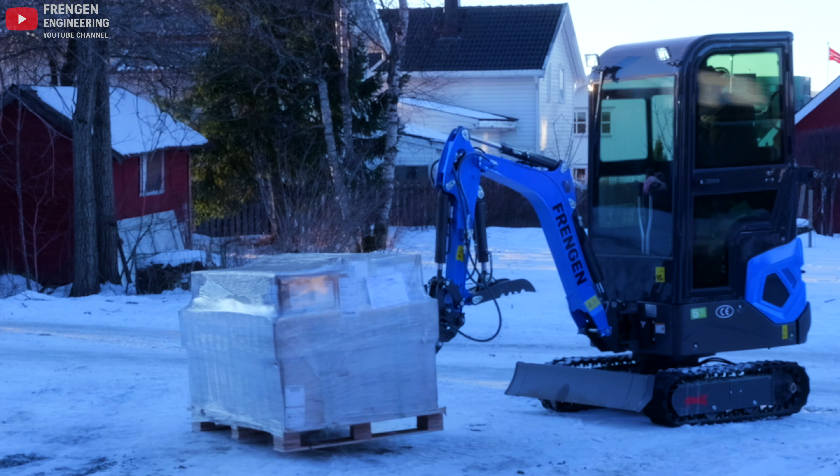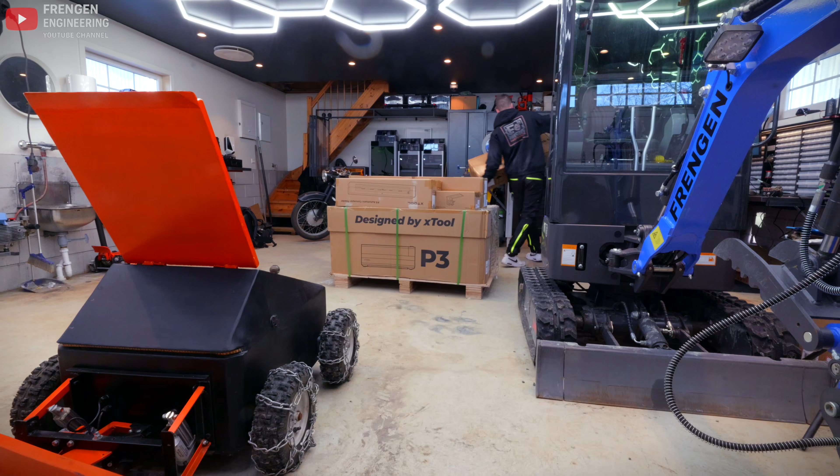So I guess let's unpack it. For the past 4 weeks I've been dealing with illness, fever and worse. I guess that probably explains why this package has been unopened in my workshop for almost 2 weeks now. Because normally when I get an exciting delivery like this, I can barely wait until I get home from the post office before the package is torn open. But this package, yeah, it requires a bit of energy.

The pallet is marked 200 kilograms, and inside is something I honestly never thought I'd be able to afford. It's a high quality laser engraver and cutting machine with most of the available accessories. And since this is a high-end machine, it costs a bit. And the reason I can suddenly afford this for my hobby is simple: xTool sent it to me. For free. I think it's amazing what you can afford when the price tag is zero. At least that's how it feels when the offers come in.

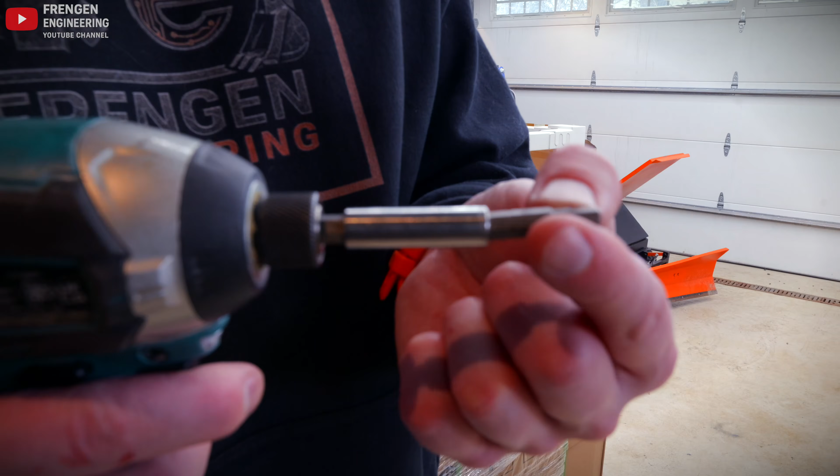My first 20 videos here on the channel was made entirely out of my own pocket. I had absolutely no goal of becoming a so-called YouTuber. I just uploaded some videos of my hobby to learn something new and hopefully inspire others to do the same. I mean the actual build projects. It was a very dark and heavy period in my life, and the projects in the garage genuinely helped me with my mental health. And to my surprise, the videos started getting a lot of views.

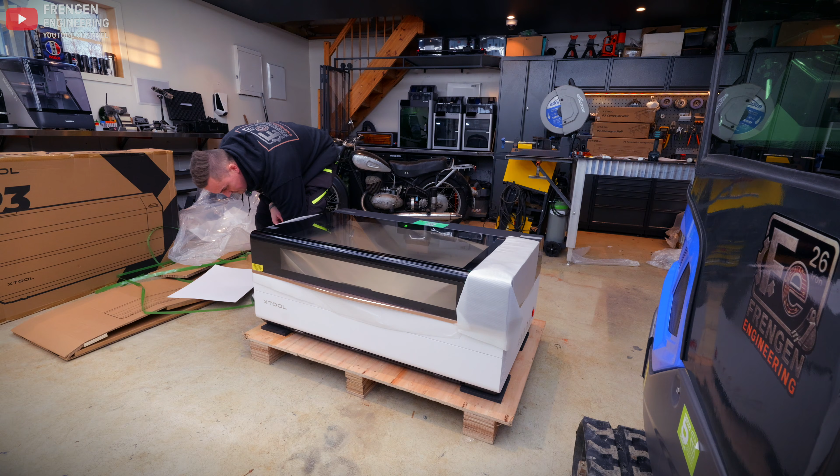And then my friend Preben said something that stuck with me. He said that if I ever manage to earn a single dollar on YouTube, it will be both incredible and ridiculous. Wow. That's when I got a new goal. My goal was to reach 1,000 subscribers and 4,000 watch hours within a year, the minimum requirement for monetization.

Yeah, it's about 100 kilograms. So how should I get the 100 kilogram machine on top of this table?

And I will say that I actually did it. Yeah, I did something ridiculous, getting more than 1,000 subscribers.

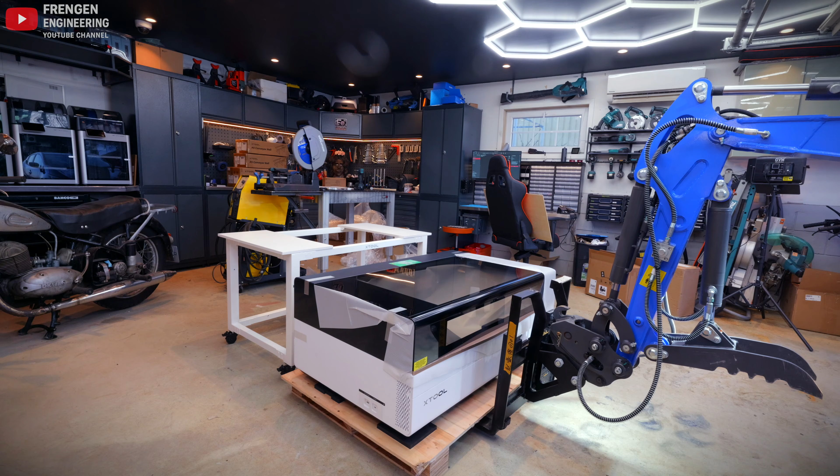So this turned out to be right at the limit of what the machine could actually lift, especially at that reach so far out. The pallet forks alone weigh around 70 kilos, and the machine and the pallet itself, I guess it's around 140. So that means it's over 200 kilograms on the boom of the mini excavator.

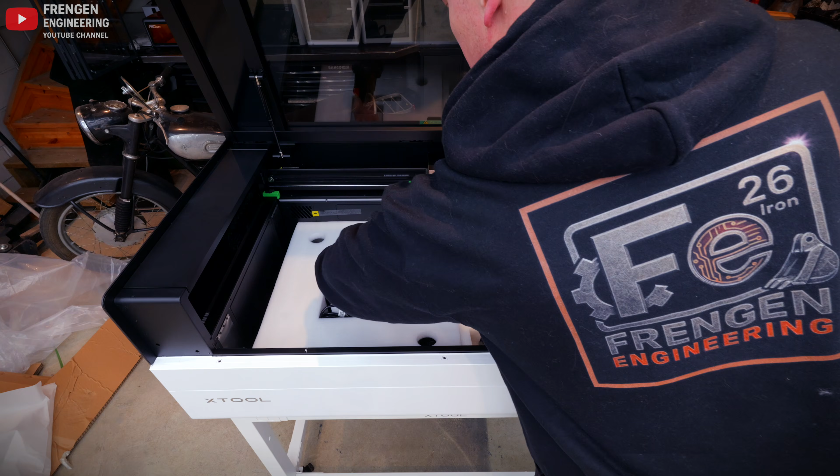The machine comes with a small exhaust fan and also some flexible tubing. Is it for hanging the P3 on the wall maybe?

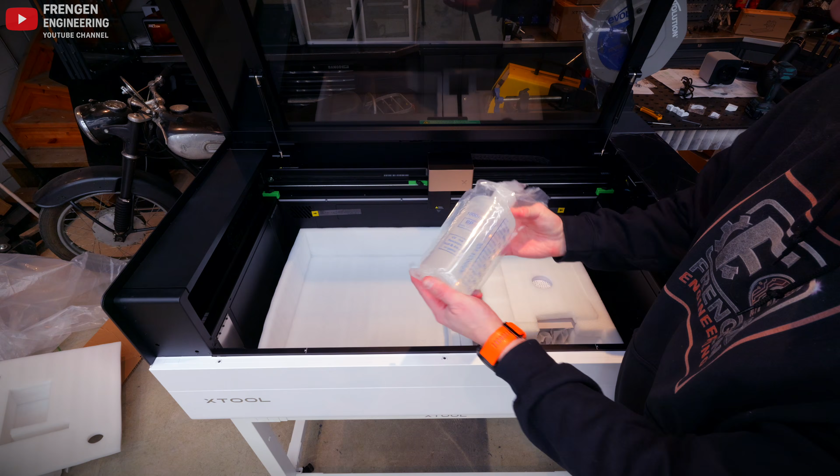And this here is some coolant for the cooling system. Tools, and also I think this is the key. It has to be plugged in for the machine to work. For safety, some masking tape. Maybe they expected me to damage the walls or something.

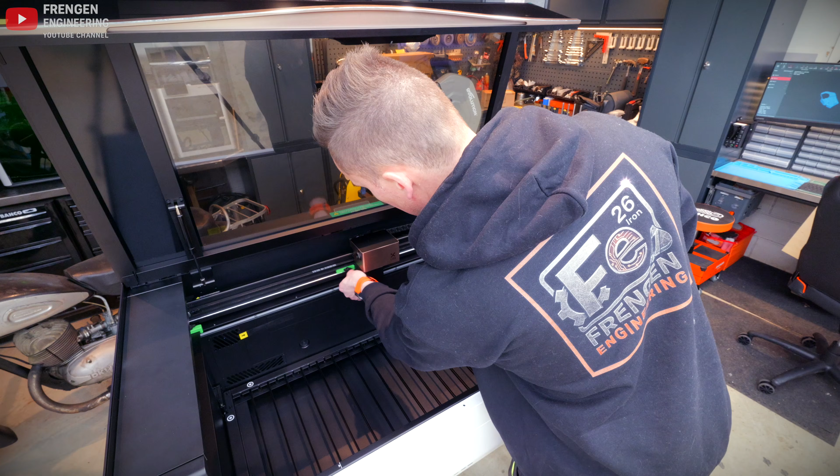Today the channel has around 68,000 subscribers and it's growing fast. And some videos end up generating a decent amount of income, while others don't. That's just how it works. You can put a lot of money and weeks of effort into one project and it generates $10. And then another video, something simple, almost accidental, suddenly takes off.

Like my mini excavator videos. Welcome our friends from Norway, okay?

Thank you. So it's unpredictable. You really have to enjoy making videos to keep doing this. But suddenly it can also turn into a small business, I guess.

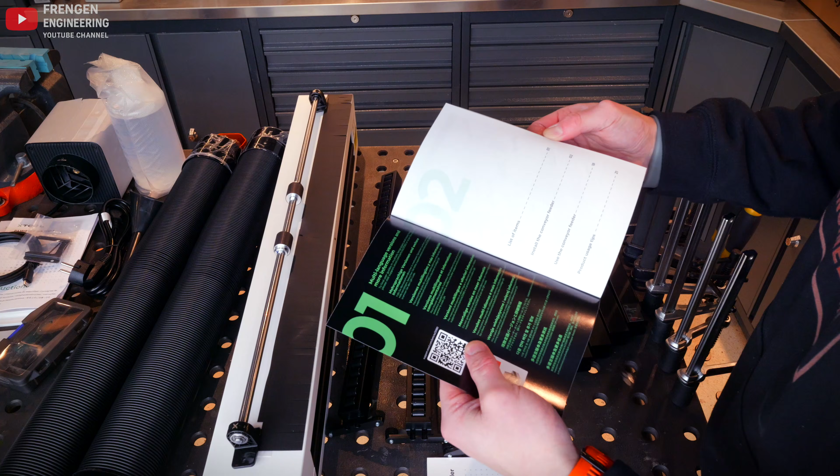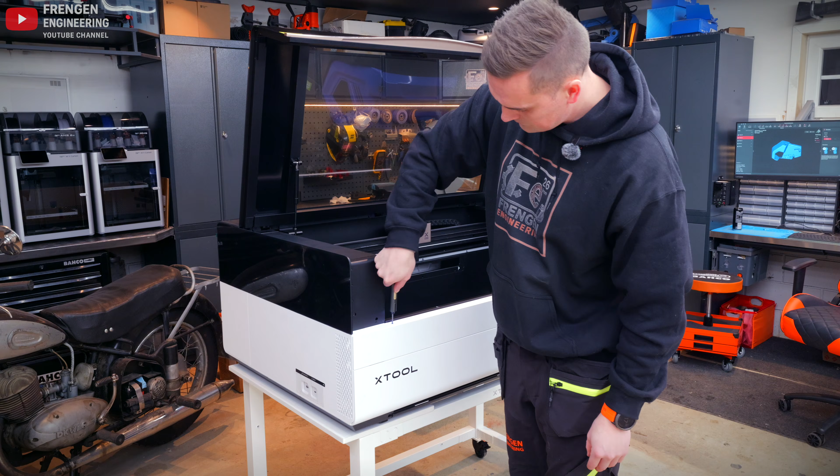But yeah, maybe I should say a few words about the machine itself. This is the xTool P3. It's an 80 watt CO2 laser cutter and engraver, a serious piece of equipment. It's their flagship model, but they also have similar smaller and cheaper alternatives.

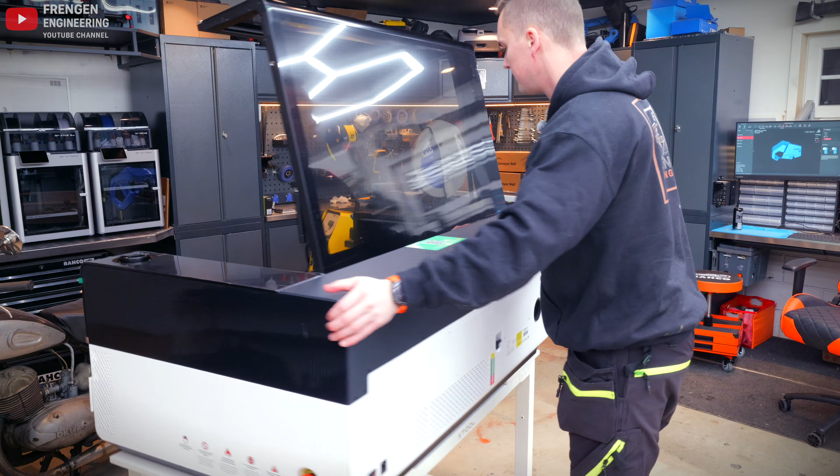So what can this machine actually cut? With its powerful 80 watt CO2 laser, the P3 can slice through a whole range of materials with ease. It's really great for cutting wood, including thicker boards, up to 20 mm in a single pass. It also cuts acrylic up to roughly 25 mm thick, and that's also with a single pass. I think that's really impressive.

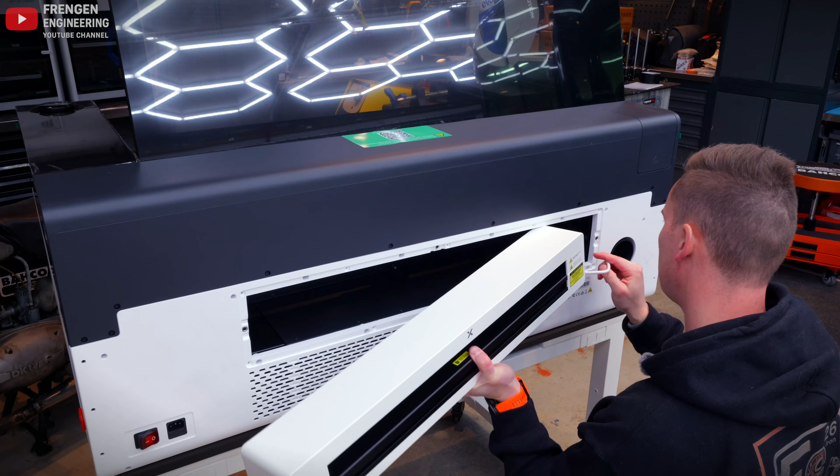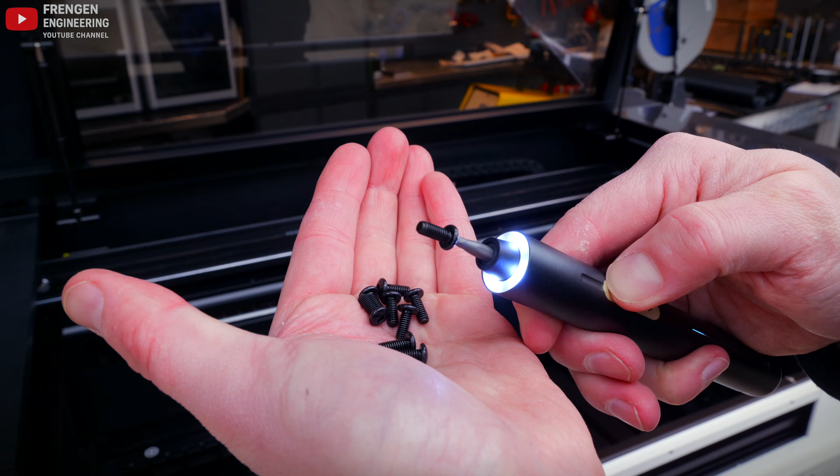And beyond that, it also handles materials like leather and fabric, rubber, and other soft to medium density materials. And the working area on this machine is huge, 91.5 by 45.8 centimeters, or 36 inches wide and 18 inches deep. Plenty of room for big projects and also batch work.

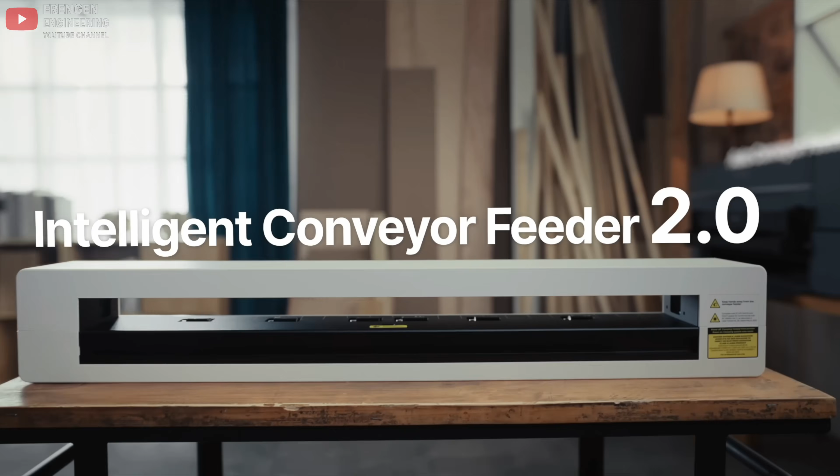Another nice feature is the conveyor system. It allows materials to be automatically fed in and out of the machine, instead of having to stop and reposition everything manually. In other words, you are not limited to the size of the workspace inside the machine. You can cut and engrave long pieces of material, and the machine itself will do all the actual work.

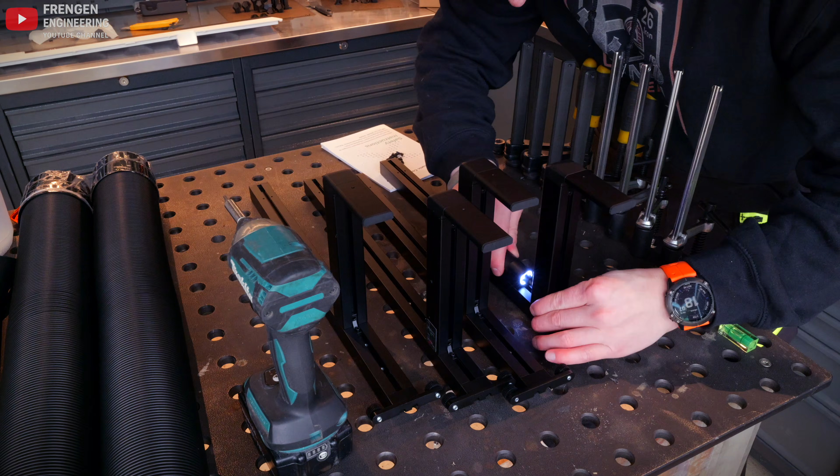And the machine that xTool was kind enough to send me has the complete set of conveyors, both the one that's attached to the machine and also the separate one that you can place on the floor. So I'm really looking forward to testing this on some large projects.

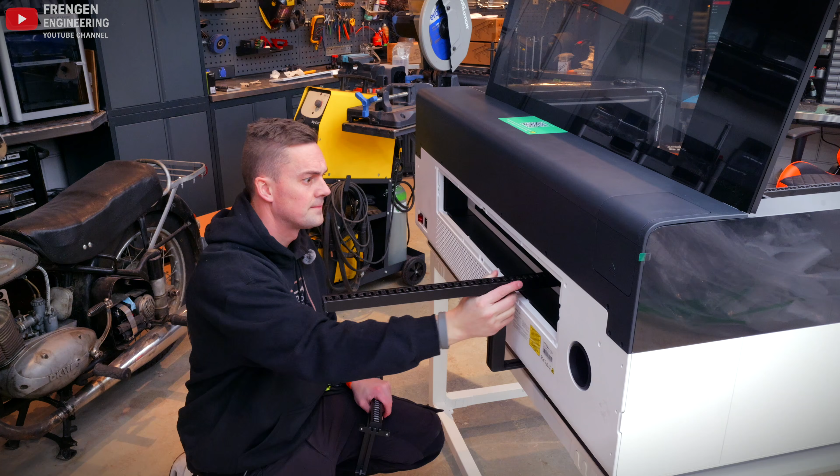One of the most impressive things about the machine is how intelligent it is. It uses LiDAR, autofocus and dual cameras to automatically measure, focus and position the laser with high precision. That saves a lot of time and removes a lot of guesswork.

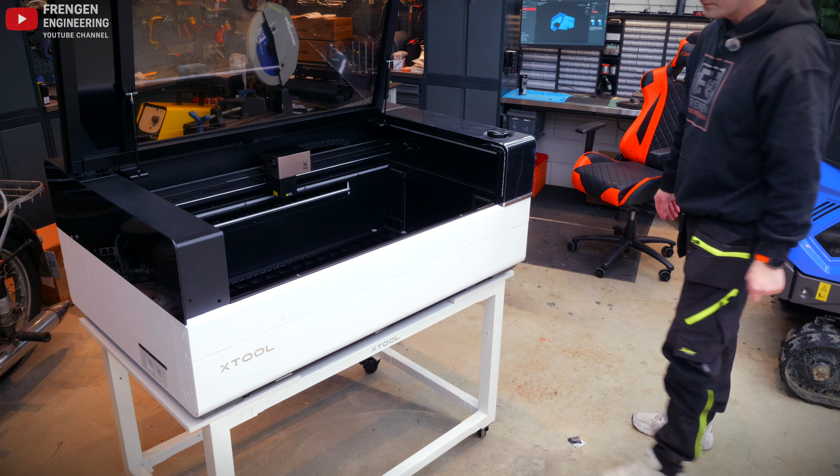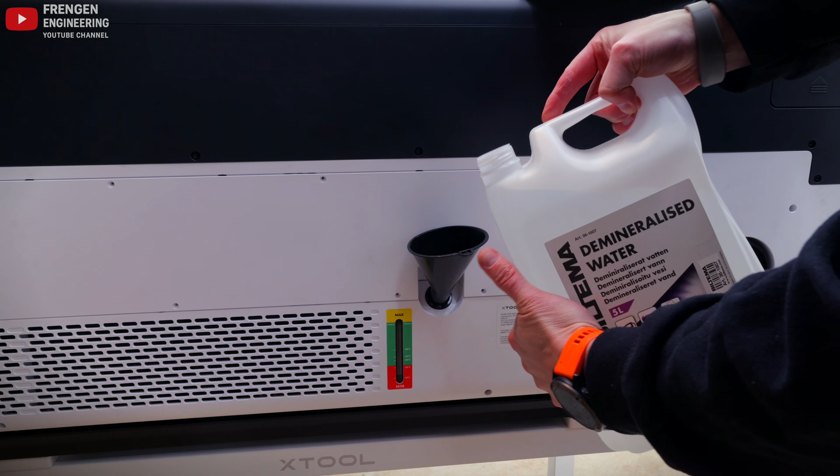The machine also has an integrated active water cooling system to keep the CO2 laser tube at a stable and safe temperature. It's one of those things you really don't think about while it's working, and that's a good thing I guess. It runs quietly in the background and does its job. The only thing I had to do myself was fill the cooling system with a mix of coolant and distilled water, adjusted for the lowest temperature possible in the room. I just fill it up to the max line on the gauge.

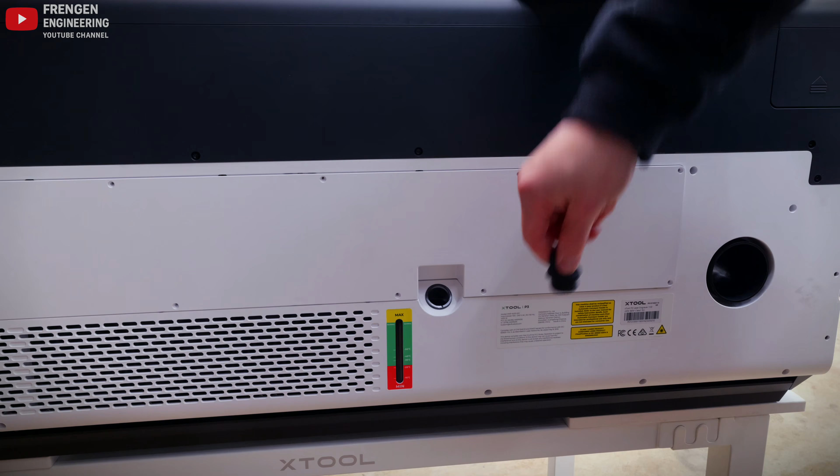Another great thing is the software the machine is using. It uses xTool's own software called xTool Studio, and it's designed to be user-friendly and intuitive, which I will confirm. In the software you can easily make your own design, or you can import the most common file types like SVG and DXF, PNG, JPG and PDF.

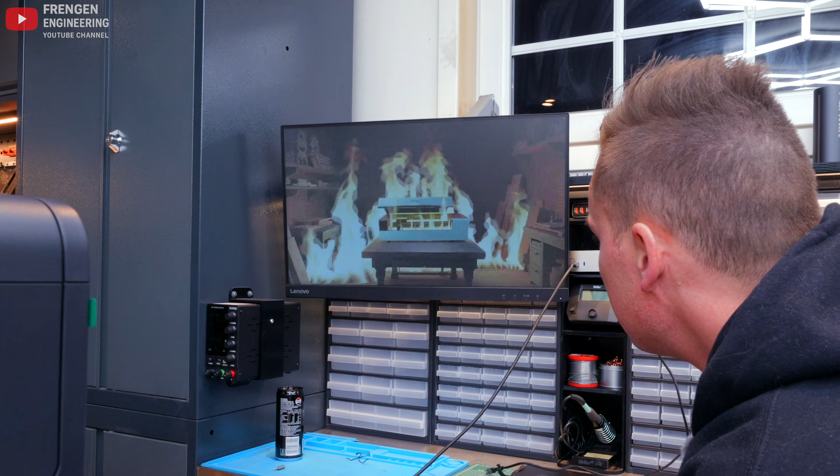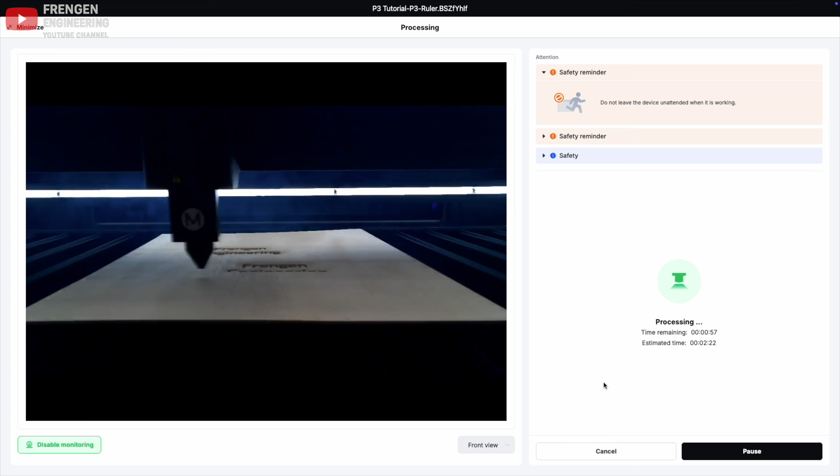The thing I was most impressed about was the simplicity of the workflow. You just place the material inside the machine, close the lid, and the system does the rest. After I place the material inside the machine, the built-in camera immediately takes a picture of the workspace and displays it directly inside the software. That means I can visually position my design exactly where I want it, right on top of the actual material. Combined with the automatic focus system, the machine measures the material height, sets the correct focus and removes a lot of the usual setup work.

I guess this one was a little too easy, so let's make a sign of my actual logo for the YouTube channel. Since the plate wasn't completely flat, I secured it using these adjustable clamps.

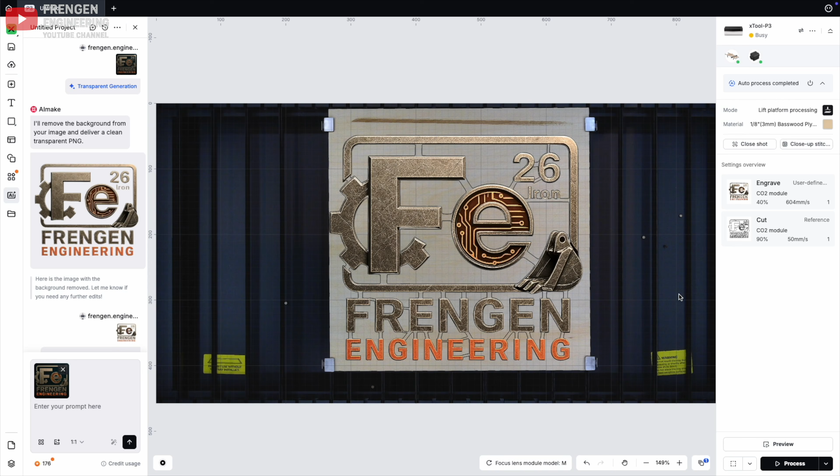This was real fascinating to watch, at least for a while. That's because the engraving process took around 40 minutes. But the cutting, yeah, it was done in seconds.

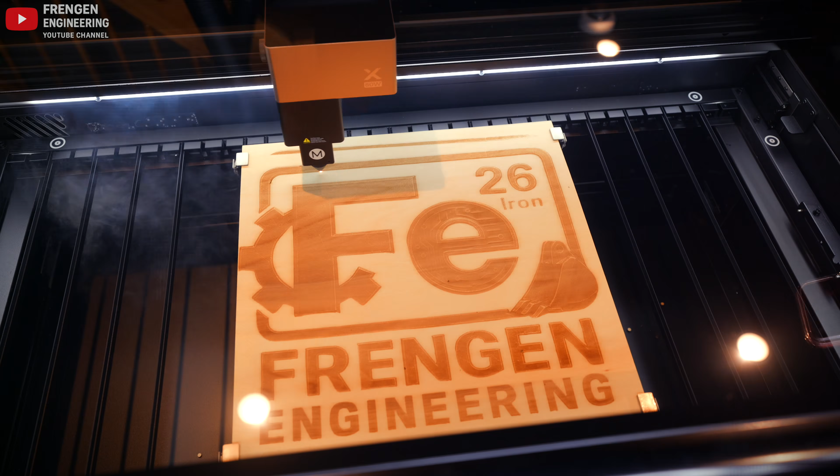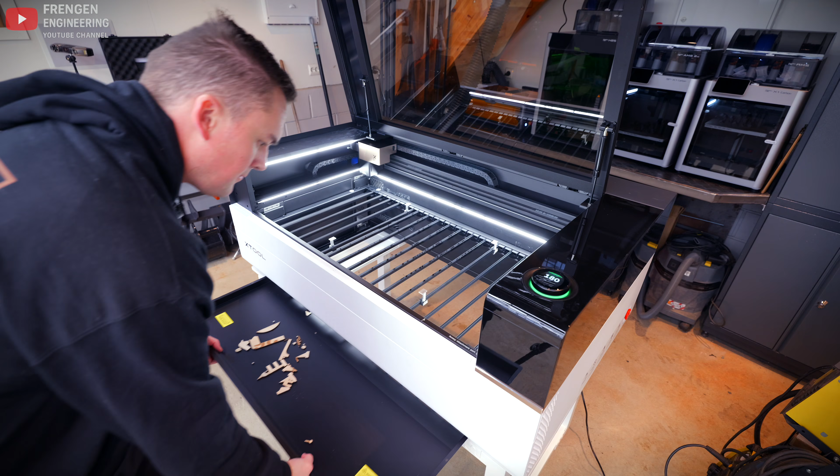After cutting was done, it was easy to remove the leftovers by simply pulling out this tray. Removing the leftovers is important to reduce the risk of fire.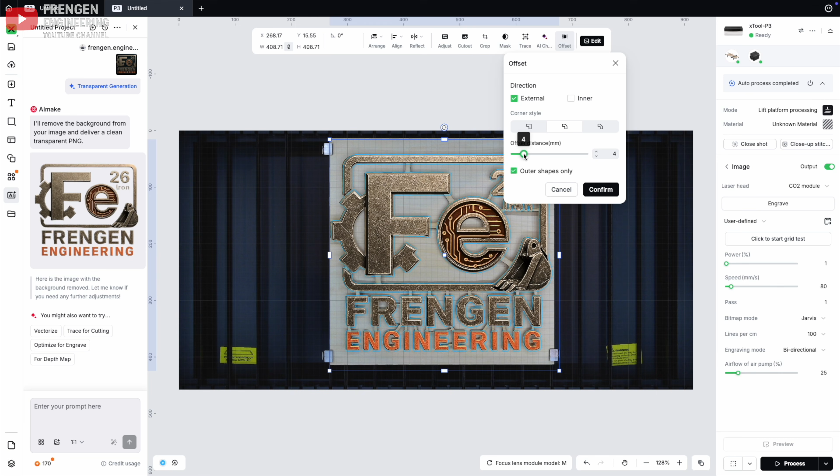The logo itself is already done, but now I want to create a backplate to mount the logo on, just to give it a little visual effect and also make the whole thing solid. I wanted the backplate to be cut out so it follows the outer shape of the logo. This was also super easy to do, using the offset function.

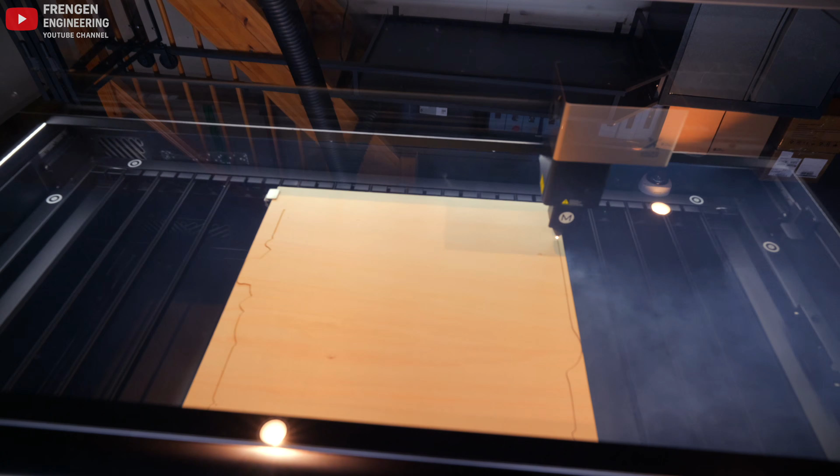Here it is in normal speed. As you see, it's real fast.

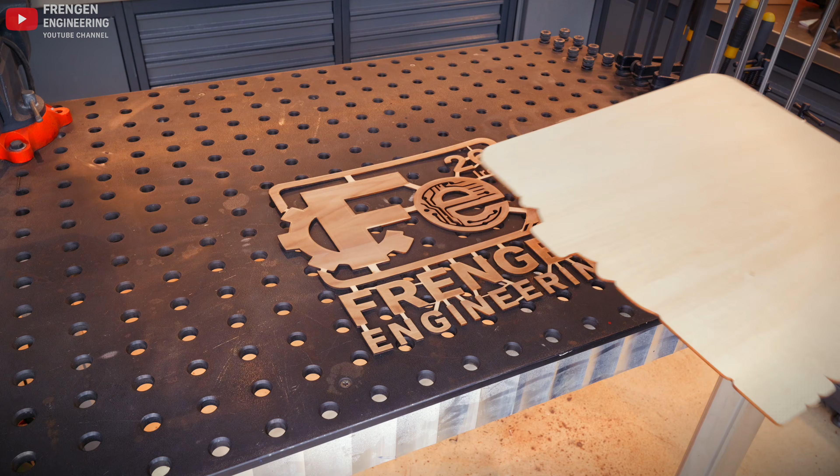Nice. The engraved wood on wood didn't really pop out, so I wanted a bit more contrast. This spray can was pretty much empty, but it was the only black one I had, so I only got one chance. I also added a touch of copper, purely as a visual effect.

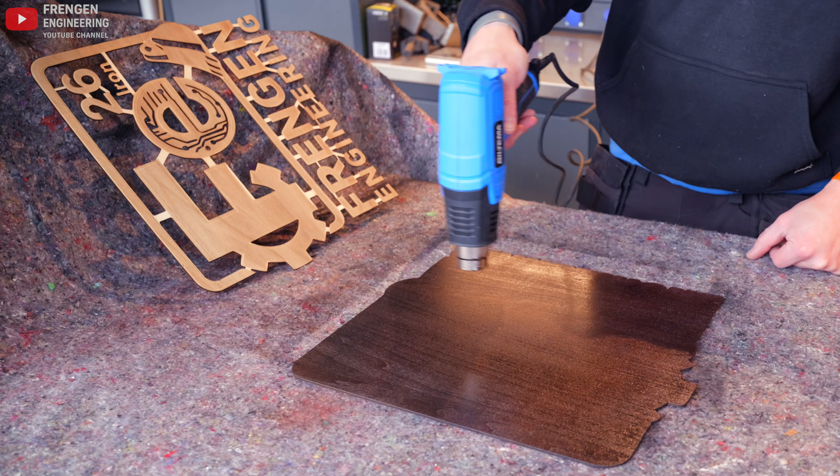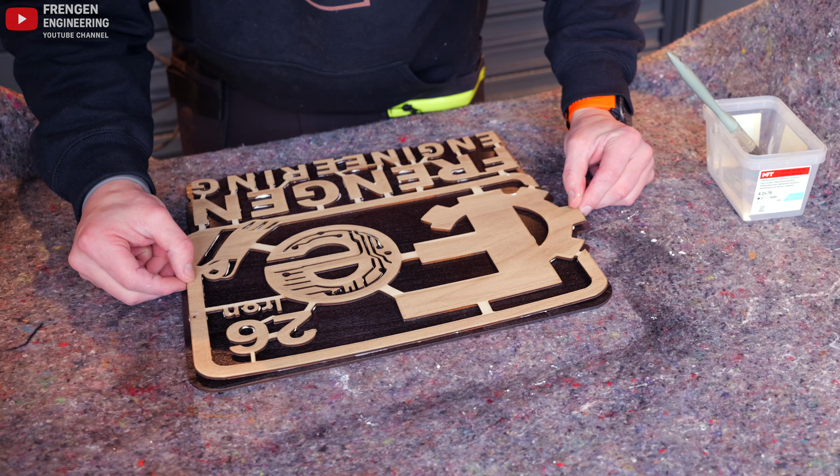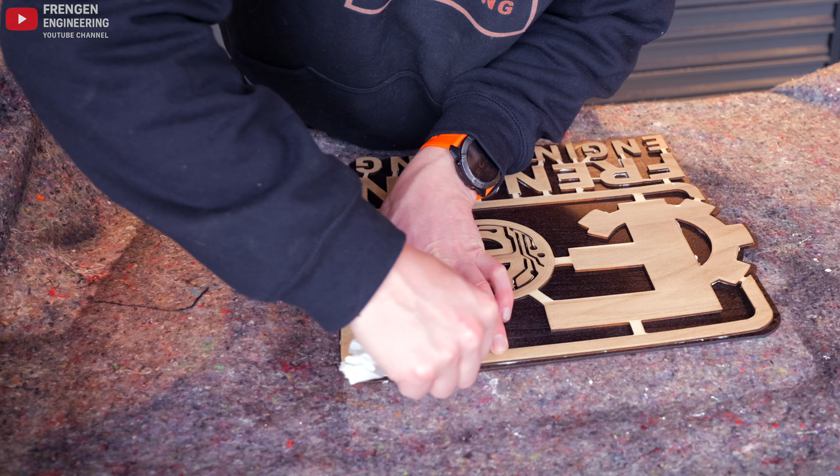This is where things start to go sideways, as usual. I figured it might be a bit of a hassle, but it turned out to be a really stupid idea. The glue was old and thick, which made it hard to apply a thin enough layer without making a big mess. Glue combined with paper is always a winner, I guess. Yeah, what can I say? Alright, time to clean up my own mess.

I think this is the better choice.

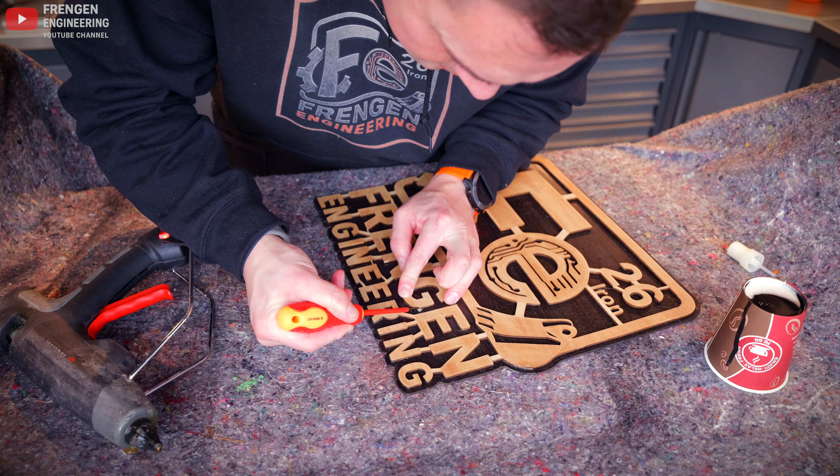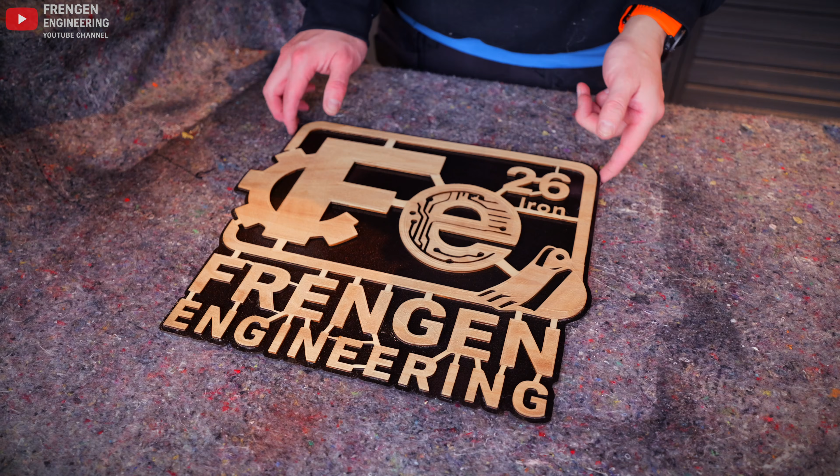There it is. I think it turned out quite good. It was a bumpy ride, but yeah, also the first time making something like this.

I must say, the P3 machine has really impressed me, and also the software, because this design wasn't that easy to make, but with the software, I think I probably used around 5 minutes making all this. Of course, I have the actual picture of the logo from before. I simply use the built-in AI tool to remove the background from the picture, and it also made these connections so that everything is in one piece.

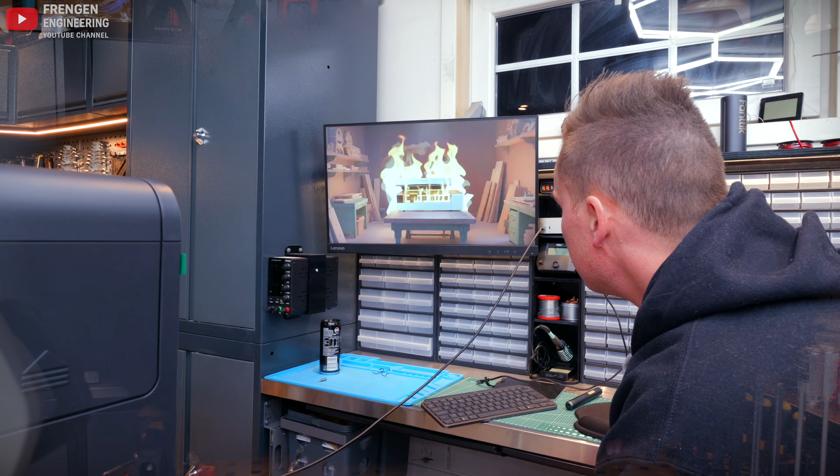Almost everything in the software is kind of self-explanatory. So I haven't done any course or watched any YouTube videos or anything, but there it is. So I will call that a win.